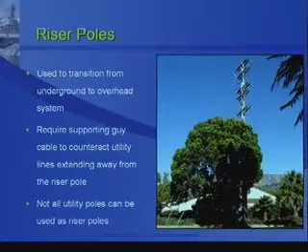That's to a large extent what we're going to be discussing tonight, how these riser poles can be located. In the project, we have six areas of concern, depicted by the six stars and the location that correlates to each star down below. We're going to seek neighborhood input on stars number one, five, and six, and as we come to those we'll talk about them in detail about what the options are that we want to hear back from the neighborhood about. Those are primarily cost issues in those points.

The stars 2, 3, and 4 represent areas where there's been difficulty with the riser poles, specifically the ones the utilities chose as their first choice. When the assessment engineer walked the district with me to give a preliminary idea of her assessment, she explained that in positions 2, 3, 4, and also number 6, the location of those riser poles would dramatically affect how many other neighbors we were bringing into the district. If someone outside the original district boundary was positively affected by where we put the riser pole, they would receive a special benefit and would need to be brought into the district, or at least have a say in whether it goes forward.

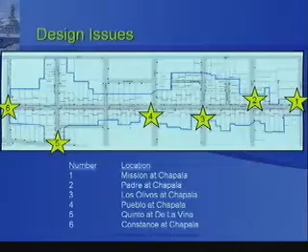So with that, the next slide will show us what's going on at star number 1, at Mission and Chapala Street. The understanding the city obtained from the neighborhood when the petition and boundary were submitted was that we wanted to start at Mission Street and have a corridor—as soon as you cross Mission and hit Chapala, there would be no poles visible, creating this dramatic transition.

We can look at that, we've looked at that, we can do that. But we want to draw your attention to the cost difference depending on where that project starts on that end—we believe the difference is somewhere around $200,000. The city is only a facilitator; we do what the neighborhood wants in terms of design and implementation. But when we hit something like this, a major decision, we think we need to come back to the neighborhood, explain it, and get your input on what you want to do.

This view is taken from what would be the Chapala side, the neighborhood side of Mission Street, standing at Chapala and looking back across the way. The first pole would be looking southeast, I'd say.

If we consider that Chapala runs clear downtown until you eventually run into the ocean, and consider that to be south-facing, we'll say Chapala going towards town is south, Mission is east, and Chapala the other way is north—though the actual compass is canted a bit and points at a diagonal. That X on the corner, on the one pole we're looking at, almost shows us true north based on how it's placed. That's exactly the position we're looking at, and for tonight's discussion we'll call that the south side of Mission Street, though more accurately it's the southeast side.

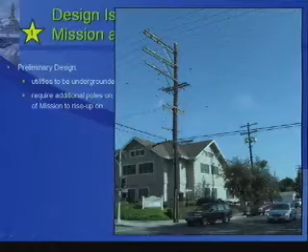These wires do not carry any Cox or Verizon services, nor do they carry electricity. They're guy wires providing support for this pole to counterbalance the wires pulling it in this direction. If we eliminate the pole up the block that these wires attach to, we'd have to run guy wires down to the ground and ultimately close the eastbound lane of Mission Street, which we can't do.

So what does that tell us? That tells us we don't want to take this pole out, because look at all the wires going up and down Mission. We can't mess with that.

We said maybe then the next thing to do would be to go down the street and rise up on this pole. But Edison has a safety condition whereby you cannot rise on a pole that has transformers on it. So that would not work for us.

Now Mr. Wagner has said we could look at potentially moving these transformers down the block to another pole, but anything we begin doing, moving things or changing this aerial configuration as it exists, adds significant cost to the project. And we also see that the further we go down the street, the more trenching we have.

So if we wanted to start the project right at Mission Street, what we've been talking about doing is having to set yet another pole right here, approximately, that would allow us to transition from overhead to underground. We would route the Cox and Verizon communication lines here, they would come to that pole, and then transition to underground. And I believe some of the Edison circuits already have a conduit, so they can get across Mission. But essentially, we would have to set an additional pole here.

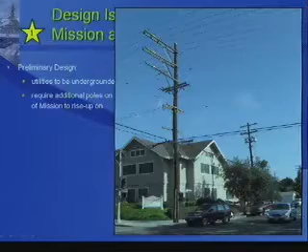And so again, we were looking at that from over here. That's one alternative that we can do.

The other suggestion that the utility companies came up with was that we have two poles that sit right here - I'll show you a picture of those in just a moment - we're going to put a vault right behind that.

If we were to allow these overhead lines to come across Mission Street and hit these poles, and then go down these poles and begin the underground circuit, our initial estimate is that we could save the project about $200,000.

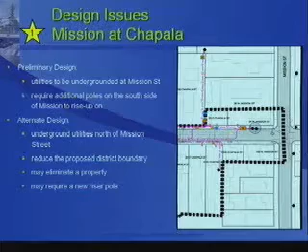Now, as John stated earlier, the city is not a proponent of doing it one way or the other. We're just trying to bring this to the neighborhood's attention that where we start this relative to Mission Street will have an effect on the cost, and we want the neighborhood to take that into consideration.

If you strongly believe it should start right when you turn right on Mission from State Street, or left coming from the freeway, that you should immediately be in the district, then we can certainly do that. But we need to hear from the neighborhood saying yes, we would prefer to incur the additional cost and have the poles located back over here, or we would be happy with having the circuit start right there.

This is a, here we go, I'll get this. These are the two poles that I'm talking about that are in existence. You can see these are the supporting guy wires that face back.

These are the Verizon and Cox communication lines coming into the neighborhood. You can see this pole already has significant underground conduit here that allows Edison to rise up on it. That conduit would simply go to a vault, and we would just continue this undergrounding on down. But we would retain this pole to provide the support for that pole across Mission Street.

And then we had thought we could either use this pole or set a replacement pole that would allow Cox and Verizon to transition to an underground circuit at this point.

So the design criteria we're looking for from the neighborhood is whether the neighborhood would be happy utilizing these two poles that are actually on Chapala Street and within the district boundary, but modifying the district boundary to allow their inclusion, or does the neighborhood say no, we want to start the other side of Mission, and the additional cost is not significant enough to keep us from doing that. I'll look ahead here one more time.

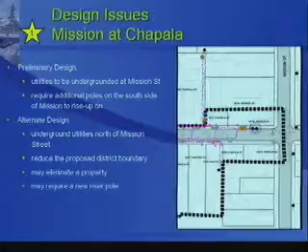Okay, those black poles would remain, as we see here. I think this is where I wanted to go next. This property then would probably be eliminated from the district.

The green line would be the new district boundary, and this property would receive no benefit because they would still have wiring for most of the length of the property in the back here. This Mission Street, 33 or 34 West Mission, would still be in the district and receive a benefit because the entryway for this building is back here, and the wires above their entryway would be removed, so they would have a benefit from that.

Okay, and then we come up, and notice here, this is one we haven't corrected yet, but in response to the owner of this property, the undergrounding is going to stop at this pole, and this will be an overhead circuit back here. That's what came out of the last meeting we had.

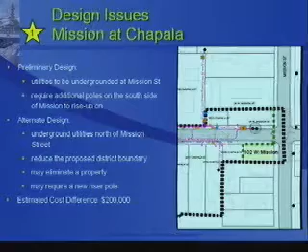So we would come down underground, go up to that pole, rise up on that pole and continue to the back property line, allowing us to serve these properties the way they're currently served. Everything from this point, north or northeast on Chapala Street, would be undergrounded. We can come back to that with questions later, but that's one of the things we want the neighborhood to consider. The second point is the pole here on Padre Street.

We looked at a number of ways to do this. One way was to relocate the existing pole at 25 West Padre. In other words, this pole here, there's a driveway, so we can't guy it back here, so we can't use that pole as a riser pole. A picture in just a moment will represent that.

That means we would have to move that pole over this way, place it here so we could guy it back in this direction. The utility companies were pretty adamant about not doing that. They said it would increase the district, the boundary would have to come over and somehow include this property and potentially that property. Their stance was that it's not operating procedure for them to benefit one property by removing a pole, only to put that pole in front of another property.

In other words, to benefit this property at the detriment of that property. So what we looked at was coming back the other direction. This is the pole we're talking about, the ivy-covered pole. We'd have to remove that.

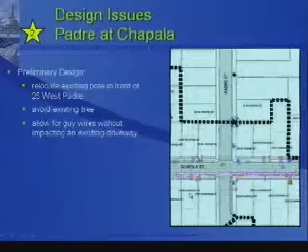But you can see if we use that as the riser, transitioning the circuit this way, we can't guy back across this driveway. So we have to move it down far enough, and then there's a tree in the way that prohibits moving it just a few feet. We'd have to move it down to this area and be able to guy it back, to this gentleman's detriment. He would have the pole in his front yard, and he would be affected by the utility district, and he was not one of the initial petitioners.

So what the utility companies have come up with is we're going to use this pole as the riser pole, and rise up at 35 West Padre. The guy wires would be on the Chapala side of the existing driveway, coming back here. The district boundary would remain intact. This property owner and potentially this other property owner would probably receive less of an assessment because they'll have this benefit of the wires being removed in front of their house, but they won't have wire removed for the complete property line on the Padre side.

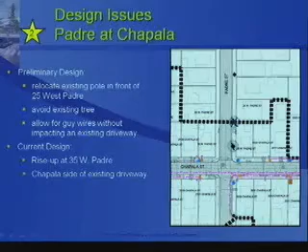So that was our situation there, and again, that is a result of the riser pole and the inability to guy this pole the way we originally thought we could. One more look at this — you can see the guy wire already exists here, and that could be the riser pole.

There would be opportunity, if it was a big issue for the neighborhood, to move this pole back more into this location, because we could still guy down here in this parkway. But the most cost-effective way would simply be to use this pole as our riser pole and transition from there down in this fashion.

Another place where we have a similar condition is with the Los Olivos at Chapala. Again, we have pictures of this, but imagine what we're looking at here. When the utility companies did their initial design, Mr. Wagner did his original SCE design, we were trying to decide what pole to rise up on, and we finally determined the best place was clear down to here, because of his design considerations. Now the problem, as the assessment engineer pointed out to me, is that we would be extending the district boundary to include 8 additional properties.

That is to say, if this undergrounding circuit here in the purple line, if all this wiring was to be taken down, this person would benefit, this person would benefit, these two people would benefit, and then because there is a driveway or alleyway that runs right here back to serving these four properties, these four properties would also benefit, because the wiring above their driveway would be removed and their access would be improved in case a pole ever falls or wires come down.

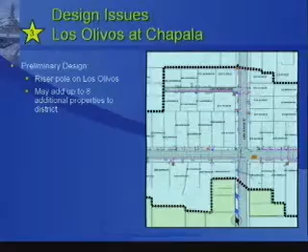So what we decided to do in this case, to honor the initial petition, not extend the boundary, and to involve only the people initially involved in the project, is we were going to come back and not underground the circuit to here, but take this corner pole, move it to the back of this property so it's right on the property line, and then transition to our overhead at this point. Simply like that. And that puts it right on the border of the property.

Notice that drops out. All these people that were yellow initially, with this pole being used, are now no longer included in the assessment in the district, so we don't have to introduce anybody else to this. And yet we achieved our goal, which was to get the wires down on Chapala Street and bring them back as far off Chapala as we reasonably can.

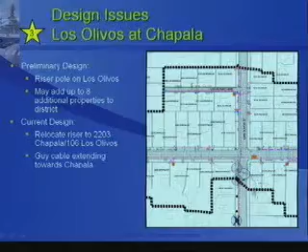One other thing I might note here is that this property across the way, the pole would again be placed about midway back in their property. The properties on this side are differently configured. So again, this property would have the utility lines removed in front of it and for a portion on the side of it. But its assessment may change because it now has utility wires at the back of the property. Let's see if we can see.

And this is that same corner. Here's the wires going up ahead. Right here is where we're talking about putting this pole. We would set it right here, kind of in between these two, we're all on the property line, and then guy it back in this direction.

And guy it back in this direction, and then this is the corner property on Chapala that's in the district. This is their side view, but their front view, and they would receive as much benefit as we could give them by placing the pole here. But that would be the answer, to place it here so that we didn't involve these additional properties.

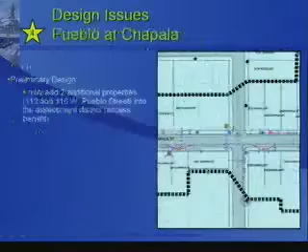Okay, this is the final decision we've made that we want to draw your attention to. This preliminary design was designed to go at the rear property line of this Chapala property here. Now this property has a driveway right here, and then this is a lower area - their rear yard goes down here, and they have a sunken garden area.

And then this is a large apartment building adjacent to them. We were told that if we placed the pole here and honored this district boundary, we would be bringing these two properties in, because they'd have the benefit of the wires across the street from them being removed. So we looked at how we could resolve that without drawing additional properties in. Those would be the two properties affected, based on the engineer's preliminary assessment.

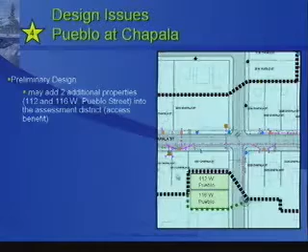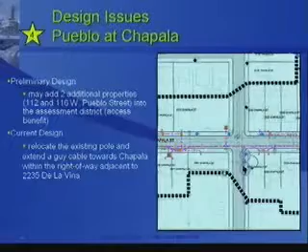She said if you do that, you're going to have to involve these properties. So what we've now decided to do is move this pole and install a new pole here, right across from this property line. The district boundary would come across like this and down - that would be where our new line would be. That means this property would still receive the benefit of wires removed in front of their house and adjacent to it, and by putting the pole here, we leave these two properties out.

And when we look at this property, we believe this sunken garden would be much less affected than a street-level garden area by having the pole located there. So we believe this is the best result.

The black indicates a pole that would be installed. The blue indicates all the poles that would be coming out, and the only change we've made is to come from this location where the purple line comes down to here. We've changed that and now only come this far off of Chapala Street, across from this property line. Again, the reason for that is so we don't involve these two properties.

So there are 3 changes we've made to honor the neighborhood's initial boundary and the initial people who signed the petition, what was discussed and presented to them. These 3 changes are the most reasonable way we could come up with to handle these adverse situations of involving more properties.

And here again is Pueblo at Chapala. Okay, do you have a picture, Jim, of that last property at 2235, where you want to put that pole?

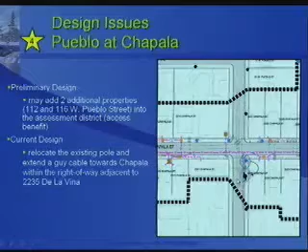Again, if the neighborhood feels strongly about any one of these design criteria points and says we'll go out and talk to those people, we'll do the legwork on this, and come back to you with some more signatures on a petition or evidence that these people want to be involved, we'll certainly honor that. We only facilitate what the neighborhood wants.

Pointing out that if these people wanted to be involved, they'd have to know what the additional cost would be to do the trenching. That's true. Breaks even, well, who cares? But if there's $100,000 savings, maybe it's worth approaching. And the savings would not be that significant. But I understand what you're saying.

That's one of the places we're constantly caught. If you've ever added an addition to your home or done a remodel, you get the contractor there, and say, how much is this going to cost us? Well, we don't know. Do you want granite or Formica on the countertops? Do you want the pole here or there? And then when we refine these design issues, our planners can look at this and say, okay, the cost to do this is this much, and the cost to do that is that much.

That's why they came to us and said pretty explicitly that the neighborhood's desire to cross Mission Street was a cost of approximately $200,000. They're willing to do that. That's not a problem in terms of how we design it. But we feel as a conscientious facilitator our role is, when we have something like that, a big thing like that, to bring that back to you, the neighborhood, and ask for your input on it.

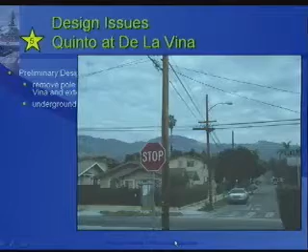Our rough estimate of the cost associated with this portion of the project would be about $100,000 to take that one pole out. In other words, to do all the things I just explained to you would add $100,000 to the project, or would cost approximately $100,000.

Our concern, again, as facilitators, is that good or bad, we are indifferent. We want to do what the neighborhood wants to do. The question we're asking is whether removal of that pole is worth an additional $100,000 to $120,000 to do all the things we talked about. That's a decision we're going to let you give us input on when we finish this and look at one more remaining scenario.

Let's see if I'm going here. We're still at Quinto and De La Vina. This talks about the alternative design: rise up on the corner pole and extend the guy towards Chapala. That's where I talked about going back from this pole, leaving it, and going back here.

Notice Lisa has now made it black so it remains. We'd go back here. These poles would all come out, okay? And the guy wire would be in the right-of-way adjacent to this, which is 2500 De La Vina. The guy wire would be adjacent to that.

And there's our estimated cost difference to use that pole as opposed to bringing all the circuitry over and relocating these poles. This would retain the same boundary, which is a good point. Notice that what you have here is that this pole would be right on the corner here.

This property, by letting that pole remain, the benefit they would receive is that their assessment would be less, because these wires in front of the property would not be removed, and they would have that pole remaining at the corner of their property. Obviously, their assessment would be for these lines if we took that pole out and moved everything across the street. And that assessment, given the fact that those wires would simply move 40 feet across the street, they would receive an assessment, but it may not really be worth it to them to just have them displaced by that small amount.

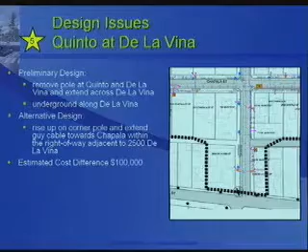But again, I'm hoping that the property owner at 2500 De La Vina is made aware of this. We've sent them letters. We'll also send a letter out, or a postcard, that advertises this website that John has given you earlier. We hope people go online, and if that's a major issue for them, they need to let their neighbors know that, and let the city know that, and we'll come back to you and look at this option. Because it's technically possible, it's just expensive.

Here's the final area we want to look at, and this was our most problematic area. There are numerous questions that came up here when the assessment engineer looked at this, and that have come up subsequently in our discussions with our distinguished planners. We have wrestled with this one, quite frankly, and it's pretty complex. But I'm going to run through it with the help of Lisa's wonderful PowerPoint here.

We're going to look at three different issues of how we currently designed this to honor the boundary, and look at alternatives, what the effect of this would be, and alternatives we're going to have for you. This is another one of those points, like Mission and Chapala, like Quinto and De La Vina. This issue here at Constance and Chapala, we're just saying, here's what happens. Please tell us what to do.

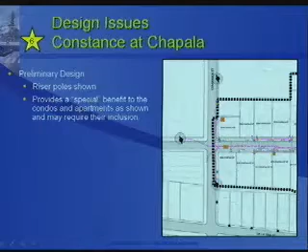The riser poles are showing these black poles that have the crosshatch in them. What the assessment engineer is looking at is, if this underground circuit, evidenced by the purple line, is put into effect, then what is the special benefit? She believes the benefit would be extended to the condos and apartments as shown. In other words, the assessment engineer has told us that if we move the underground circuit down to here, and the reason we did that was to avoid, we couldn't put a pole right here because we couldn't guy into this driveway. We had to go down far enough that we could guy back and still miss this driveway.

What the assessment engineer, and again, this is a professional engineer, this is what she does for a living. She's probably the most well-known assessment engineer in the state, works all over the state. When she comes into this, she's looking at it totally from an objective viewpoint. She's just saying, I don't know if the mayor lives here or not, and I don't want to know, because when I look at this, I want to look at it totally objectively.

But what she's told us is that if you do what you're planning here, then this driveway will have no wires above it, and this corner of this condo property will have no wires above it. There will be some assessment to these condo property owners, and this whole yellow area, 33 condos, each with a separate owner, not one owner we can deal with, would have to be brought into the system. Also, the benefit achieved by undergrounding all these wires here would affect various addresses of up to 43 condos. Some of these condos would receive a benefit because the wiring across the street was being taken out. Specifically, this corner condo, because the wiring that currently runs here would be removed, would have received a special benefit, and she would insist on including them in the discussions, the vote, and ultimately sharing the cost of this with us.

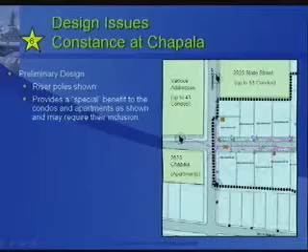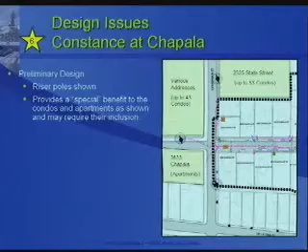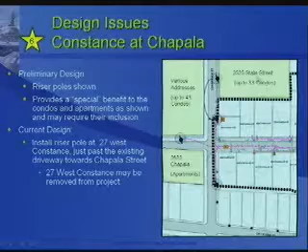But we took an alternate approach that said, what can we do to alleviate this condition? Again, remember, this is not always a win-win compromise. It's not everybody's going to win here. But here's a couple things we've looked at doing with the planners. The first one here is this pole that would involve these condos, and what we've looked at doing is moving that back to somewhere in this area. Now, I know that these two properties are proponents of the project, and I know that these wires have been a concern to them.

But in order to keep these condos out of it, we can't use this existing pole because we can't guy back. The strain is going to be towards State Street, and we can't guy this back into the driveway. So here, we've got to find a location either in front of this property where we can place the pole and guy it back, or this is a garage for this corner property.

We'd have to come even further back so that we don't guy into their driveway. So what we're saying is this pole needs to be moved back, location to be determined, but somewhere in this area. The reason would be to not involve these people and to have less involvement with these people here.

This is the property in question, that corner. If you look at this pole, let me make sure I have this correct. Yes, this pole sits right at the corner of the condo project, and here's the driveway that goes into their project that I mentioned. There's one on either side of that pole.

And if we set another pole down here by this white car and guy it back in this direction, we would be clearing the entrance to that driveway with the riser pole and then providing that access benefit to the condominium owners. This property here, again, a proponent of the project—

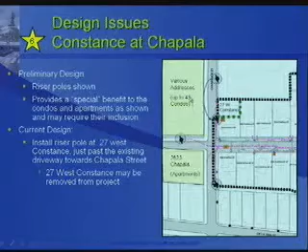The other option would be—let me go back to this—these properties are also obtaining a benefit from these wires being removed, and specifically from these corner wires being removed. So the view from the balconies of these front condos is going to be dramatically improved looking down in this direction, if the situation occurs the way it does.

So this pole is existing. We were going to go down to it with this additional trenching, and underground the circuit there to conform to the neighborhood's original desires. But because we were going to include these condos, we're looking now at installing a new riser pole at the corner of Constance and Chapala.

The benefit from that would be that with that pole there, no wires would go towards State Street from that pole, but the wires from across here would rise up on that pole and continue down the side. We believe that's going to eliminate these 43 condos, or some portion of them, from any kind of benefit. The assessment engineer would say that depending on where this pole was located, the undergrounding on this side of the street would not provide significant special benefit, because they had these wires here and wires from this point on.

So that's an idea we've come up with as to how to minimize the impact on these condos in terms of including them in the district.

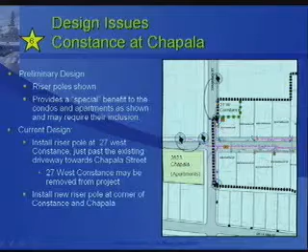If the neighborhood decided to stay with this riser pole and this riser pole, then we'd have to be prepared to talk to these people and to these people about being included in the cost assessment.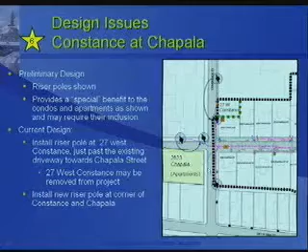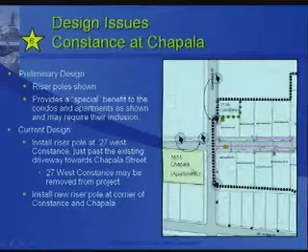Finally, we're looking down here at this pole. I'll go back—you can see this is where this pole was initially designed to come out. This pole, in compliance with the neighborhood's expressed desire, was going to stay and be the riser pole. The assessment engineer told us that because we were moving all these wires, specifically the ones across this driveway that could potentially fall and block access in a major earthquake, windstorm, or other disaster, those property owners would obtain a specific benefit—an enhanced access into and out of their property and apartments.

So we looked at how we could counter that. One option would be to go over and talk to this property owner of these apartments and see if we can get him on board with this. That would be a solution.

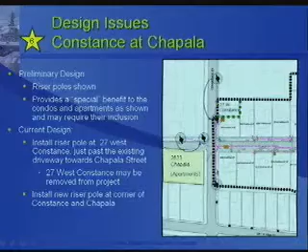If the neighborhood decides they don't want to increase this in any way, the other solution would be to use this pole as the riser pole. This pole rises on the pole at 2535 Chapala. We believe that is in significant compliance with the neighborhood's desire, which was to create this sector along Chapala as a pole and utility wire-free sector of street.

It doesn't offer as much benefit to this property, 2535 Chapala, as if it came clear to the back of their property. But the net result is that these properties become removed. Here's a picture of that. This is looking back, this is the property we're looking at. It looks as though there's this property and then this...

retaining wall, or this fence, if you will. It actually doesn't really retain dirt - I think it's more of a privacy fence with these nice tiles in it. That extends all the way down here, past this point. So we were going to go clear down, if not to this pole, well, to this pole, and underground all the way up

to honor this boundary. Now what we would do is turn the corner and go down to this pole and rise on this pole. That puts us in front of this driveway over here that comes out, so that these people would not receive a special benefit. And again, there would be a little benefit in the fact that this wiring would be removed, but the wiring at the corner here where the other pole we talked about would continue, as with the wiring from there. What that does, in moving that pole, is remove them from the assessment.

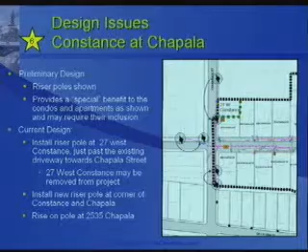And so in doing this, the design issues that we've discussed with you, and our proposed solutions or proposed ideas, have all been about making sure we don't add additional properties to the district, and that we don't suddenly hit you with moving a pole that's a really huge cost - costly, $100,000, $200,000 - without first advising you and your neighbors of that and getting your input back. Just a couple final points here I wanted to look at with you, and then I'm going to turn this back over to John to talk to you about streetlights and then take your input.

The new above ground equipment, the SCE pad mounted transformer and switch, or PMEs, are represented by these yellow stars. I'm going to show you a picture of what those look like. And these triangular situations here are where underground vaults would be installed throughout the district.

And with these underground vaults, I want you to take some consolation in this. The underground vaults do have a couple pipes that stick up to supply fresh air, but these vaults are now constructed in such a way that this is not going to be a situation where you have a metal vault cover out here that rattles when a car goes over it. These are concrete, they have concrete lids, and in the center they'll have a single manhole. So you'll find that these vaults, once they're in and we've paved this back, will be all but innocuous - you won't even know that they're there.

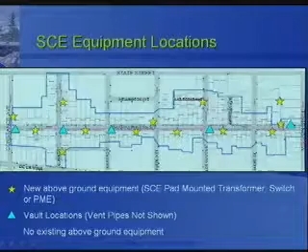They do have to have these two pipes that come up in the sidewalk. You see, that's what the vault access looks like right there, that's what the entryway looks like. And then they have, you can see here, a little bit larger concrete lid that they can lift off if they have to put transformers in and out with a crane or a heavy piece of equipment. But once it's established, it pretty much closes over, and you've got the same thing as a sewer manhole. On the curb, you have these two vent pipes that go down and supply fresh air for cooling. These pipes can also be painted Malaga green, the same color as this pole or this pedestal here.

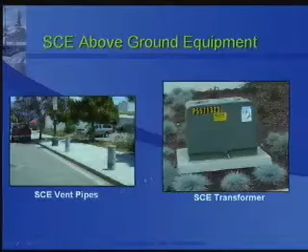This is representative of the SCE transformers, again, that would be located in all of the starred areas - what we call, what the SCE planner calls, a switch or a PME - but they're all roughly this size. I think we don't have an exact dimension, but it's roughly the middle of your thigh, 30 inches high or so, and again pretty reasonably innocuous. What these contain are all those gray garbage can things that you see now on the poles - those transformers. When they take those down, they have to put them somewhere.

I didn't want Tom to take offense to me referring to his transformers as garbage cans, but that always is the best way - you say, 'oh yeah, the garbage cans that hang up' - but anyhow, that's what has to go in this equipment. And one of the reasons the planner has to plan this out the way he does, as he's expressed to me, is these kind of have to be in the middle of the block.

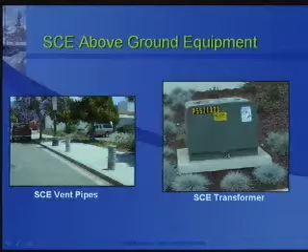A lot of times transformers have to be in the middle of the block because the transformer serves properties in this direction and that direction. If you put it down at the end, the people at that end would have less suitable power because of the resistance and additional wiring coming down that direction. They would have more resistance in their wiring and subsequently a little less voltage than people at the other end. So by locating it in the center, we can balance that out so nobody is adversely affected in terms of their power supply. That's what that looks like.

If they're on private property, they have to have an easement, an agreement with the property owner, to locate them there. In a lot of cases, I don't know if they can be located in the parkway or not. They are located for this particular project right behind the sidewalk on private property, and that's for a number of issues, primarily traffic safety. As mentioned, we require easements to put equipment on private property.

This particular neighborhood does have a parkway. So the transformers and the pad mount equipment similar to the transformers will be behind the sidewalk on private property. All of the flush mounted boxes would go in the parkway itself. We can talk about that in detail later.

That's correct. Here's De La Vina, and this would be State Street. I'm sorry, let me repeat that question. The question was, where these stars are located, what side of the street are they actually located on? I believe the stars pretty much represent what the planner has planned, that they would be on the south side of the street, or the side closest to De La Vina, furthest away from State Street, except for a couple on the side street.

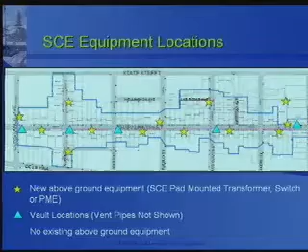The other thing that we took into account was the petition or the vote for this type of district, and we tried to put the transformers on a property that voted for this type of project.

Okay, we're just about done with the presentation here, so let me just move on. That, again, is what the transformer would look like, and then the vent pipes as discussed.

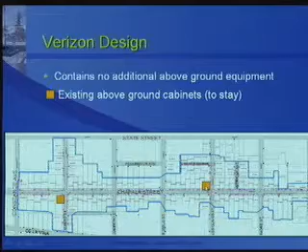This Verizon, represented by Mr. Tom Selman, Verizon is not going to have any additional above-ground equipment. There's nothing above ground that will be located in the district when they do their undergrounding. They do have two existing above-ground cabinets shown here on Quinto and Los Olivos, and we'll show you a picture of those, that would remain.

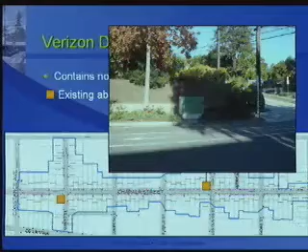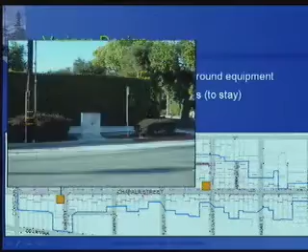That is the one on Quinto. Nope, excuse me, that's the one on Los Olivos Street, Chapala proper, and this is Los Olivos over here. And I believe that one is the one on Quinto, right around the corner, and Chapala Street is over here. So those boxes, there'll be no additional equipment offered or constructed by Verizon, however those two pieces of equipment would stay. We could probably try to get this one painted, looks like somebody's been kind enough to cover up the graffiti that was put on it.

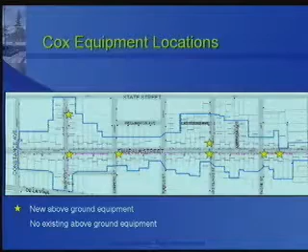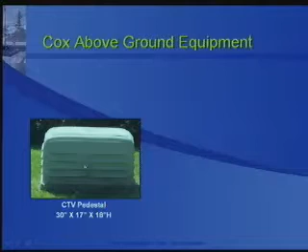What happens here is when the technicians come out to work on this, the underground circuits rise up in this, they get amplified or modified in any way, dealt with. When they come out, these box lids actually lift straight up, they lift off, and then they can work on all the equipment that's under that.

So, with that, I'm going to pass the mouse back to Mr. Wozniak. Again, I appreciate your patience and attention, and your very thoughtful questions. Once we finish with this, we'll take any other comments or questions you may have.

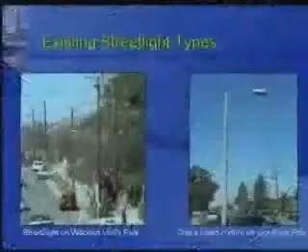Thank you, Jim. I want to move on to the existing streetlights. As you well know, there are two types of streetlights out there with cobra heads. One is mounted on the existing wooden utility poles that are going to be removed, and there are cobra head fixtures on concrete poles.

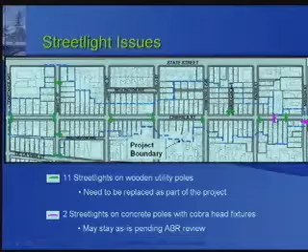This slide shows you where there are existing streetlights in the neighborhood on wooden poles, represented by the green symbols. And there are a couple streetlights on concrete poles with cobra head fixtures, represented by the purple symbols. Those purple ones potentially could stay, depending on the selection of the new streetlight type for the street, and potentially with ABR review if necessary.

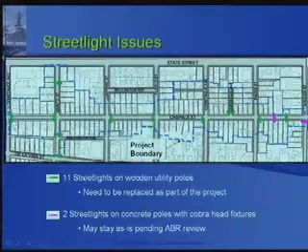Thank you. Thank you. We'll fix that.

I'd like to make you aware of a council action earlier this year in February. We have a streetlight design guideline document that was adopted and approved by council, and it reflects the street lighting issues for the city. Generally, there's a plan to replace the existing Cobra head fixtures in the city with a new replacement fixture.

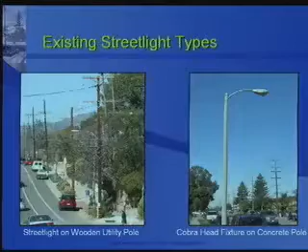The city boards and commissions and the council have raised concerns about the Cobra head style, which shines light outward and isn't efficient in directing light downward. With goals set by the streetlight committee, including representatives from boards and commissions and the city council, the group put together a document reflecting the goals of street lighting in the city, and it was approved by the council.

There are two types of fixtures that are city standard fixtures considered for this project. Some of you may have seen them. There's a fixture like this existing right across the street from this building, and you may have seen them in the Cottage Hospital vicinity and on new projects.

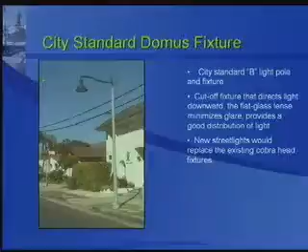It's referred to as the Domus-style fixture, and it can be retrofit onto existing concrete poles within the city. It has an arm that extends the fixture from the pole and disseminates light onto the street, giving pedestrians and all modes of transportation illumination for night vision. These fixtures have a cutoff that directs light downward so it's most efficiently spent toward the ground and target areas. That's the general fixture for replacing the Cobra head.

But this is an option for the neighborhood to consider, and we'll return with costing information once we get our arms around costs with these. Initial indications suggest they may be somewhat comparable in cost. We'll confirm that—my guess is there may be a plus or minus 10, 15, possibly 20% cost difference, but I can't confirm that right now. I think they're comparable; I'm assuming they're comparable costs.

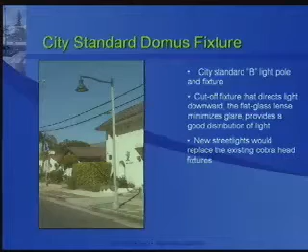So we've talked with our energy and facilities manager, and he's explained he would entertain either fixture for the street, since he ends up maintaining them after we're done with the project. So they're both on our city design guidelines list and are candidates for your street.

So we'd like to get the neighborhood's input on these two types of fixtures. Any new fixture would be a concern with regards to the design guidelines.

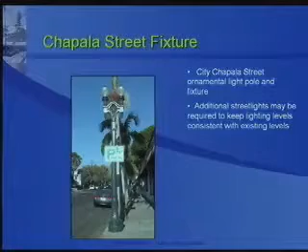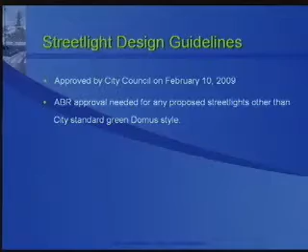One of the goals of the streetlight design guidelines for the city was to minimize the number of fixture types in the city inventory, so we can be cost effective throughout the city and so maintenance people don't have to keep numerous spare parts for various types of fixtures. We have a limited inventory of streetlight fixtures in the city—the State Street fixture, for example, and a Carrillo Street fixture, among various others.

So the intent is to not create a significant number of additional street fixture types. What we'll be doing is talking to the neighborhood, and as a follow-up to the previous discussion on design and streetlight issues, we'll be sending out information to everyone within the district boundary as approved by council, to seek input on these design and streetlight issues, and we'd like to include that information.

If necessary, we can come out to the neighborhood if there's a desire to hold a neighborhood meeting to help people with more information or elaborate on what's provided today—maybe someone doesn't have a computer to access this video, for example. If that's the case, we'd be happy to have staff or Mr. Bridge or our resources come out and talk to people again. One of the goals is to get neighborhood feedback so we can send a postcard or information packet to every individual property owner.

And then we don't always get everyone to respond back, but we would use the information we get back and try to take next steps forward and continue to work with the neighborhood on these important issues for us to finalize the design and take next steps.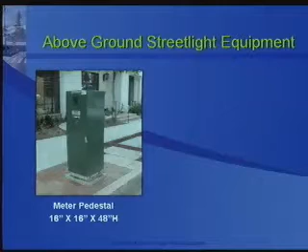That would be on the parkway. These meter pedestals are installed within the city right-of-way in the parkway. In this case, yeah, it's on the parkway, typically just off the sidewalk.

So with that, we conclude our presentation. We do need to resolve the streetlight selection, so we'd like to get input from the neighborhood on that. We'd like to finalize the utility drawings, again, only after we've received neighborhood input. Then we'd like to initiate the finalization of the assessment engineer's report.

As Jim mentioned, we've had contact and we've gotten the assessment engineer working again on the project. What the assessment engineer needs to know is where the termination of the overhead lines and underground lines are, those riser poles are, so that she can finalize her draft assessment engineer's report. So once we have conclusion on the design issues, then she will have another meeting in the new year on the assessment engineer's draft report.

So through that process, there will be a finalization of the district boundaries based on design and assessment engineers' report issues, as Jim has gone into great detail and talked to you about.

So again, we'll have as many public meetings as needed. We can have more formal meetings like this, or we can have neighborhood meetings if that's a desire of the neighborhood. Our goal is to have a postcard straw vote on the pulse of the neighborhood to see if the level of support is where it's at, because the council has previously indicated that they're looking for a strong neighborhood level of support.

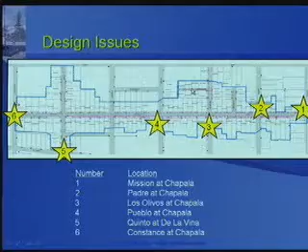I can't definitively answer your question because it's something the assessment engineer will factor in. By law, she's required to have her assessments be in direct correlation to the benefit. So if there is a lesser benefit to a property, there would be a corresponding lesser assessment. That's something we'll be getting into with individual assessments. So if you feel you have a lesser benefit, that's a discussion you'll have to have with the assessment engineer. My answer is general because I don't have any specific assessment figures or ratios or points to give you today.

Okay, thanks. One more real quick one.

On the topic of above-ground beautification systems, the pavers, the contractors doing the paving - we have on Los Olivos near our street a very classic vintage concrete street. So far we don't have too much of the patchwork effect like so many streets in Santa Barbara do, unfortunately. So I wanted to know what extent they're going to go to make sure that beautiful old, light-colored concrete street might be replaced the right way. So far they've done a little bit of work there, and it looks like it's beginning to start looking patchworky, which is sad.